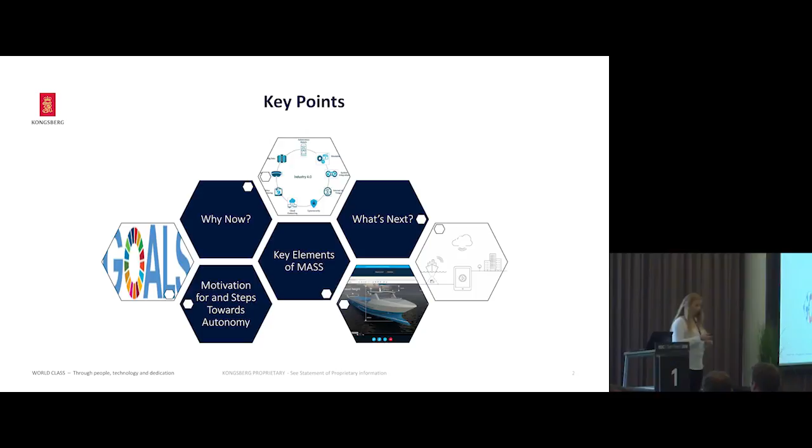But before I start with the details, I'd like to share with you Yara's motivation for going into this project and starting this really cool concept with the world's first fully autonomous, unmanned, zero-emission and ballast-free container vessel. So just watch this.

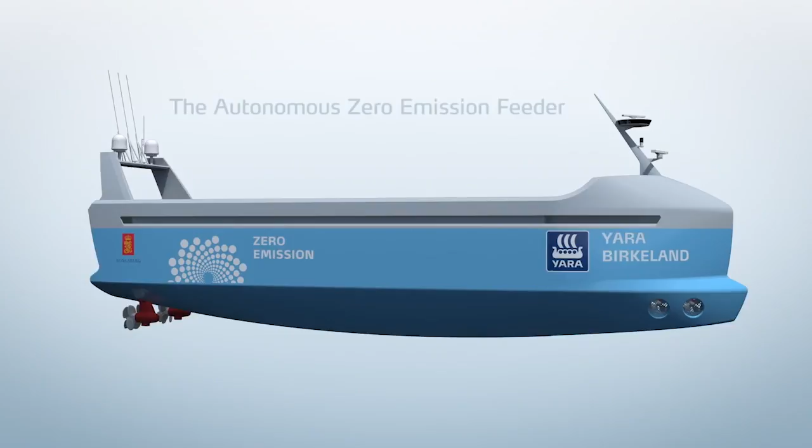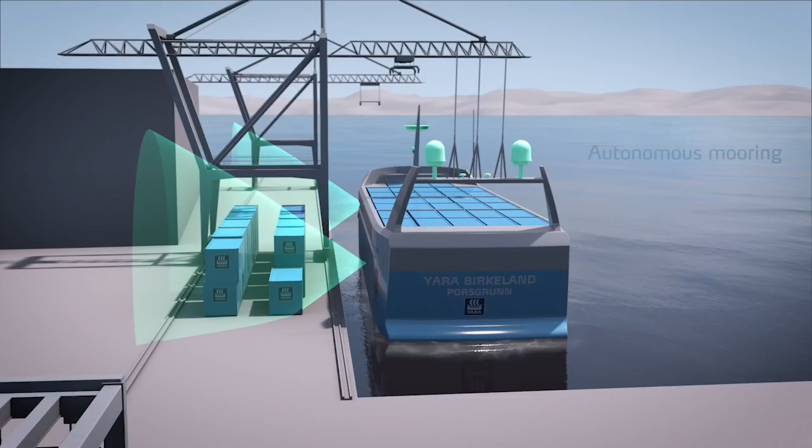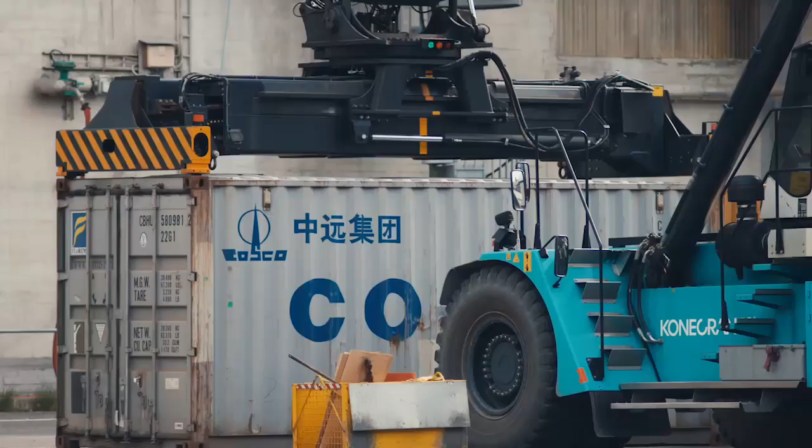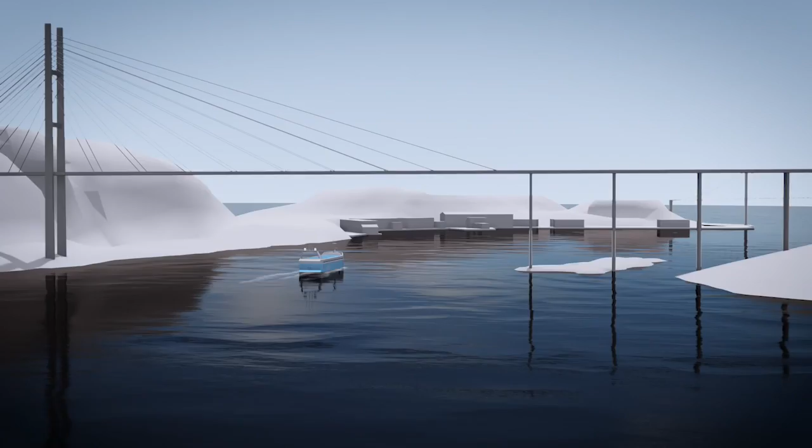Earth. It's filled with incredible wonder and immense challenges. And it is our collective hunger for innovation, our curiosity, and our collaboration that grows our knowledge and allows us to thrive. This is the first autonomous commercial vessel in the world, and it's also the first commercial zero ballast vessel in the world. The idea was actually to transfer the goods from the road into a conventional container feeder. That was the start. And then we started to look into more environmental friendly ways of doing the shipping activities. Yara is a fertilizer company, not a shipbuilder. So to make something like this a reality, we had to collaborate. For us, the natural and very good partner was Kongsberg, who has the technology to pull something like this through. This project is the world's first fully electric, autonomous, ballast-free container feeder. So it will be a game changer for the environment and for the shipping industry. The number of containers coming out of Porsgrunn have risen steadily, and it's become more of a problem the last, say, 5 years. So over time, we have been more and more interested in solving it. This vessel will transport fertilizer from Yara production plant to the two export container ports in Brevik and Larvik. We estimate that on behalf of Yara, it will transport approximately 25,000 containers per year. They have a real need, and they need to improve the local environment where they operate. So that's what's so exciting about this project. And I think what set this opportunity aside from many others is that we could reduce emissions by moving truck transport to sea. The thing about Yara is, if you look at our mission, is to feed the world and protect the planet. And very few opportunities arise that both enable us to save costs, to impact the environment in a good way, but also to really impact the wider business community positively.

Okay, so now you know a little bit more about Yara's motivation for going into this project, the world's first project. But as you have perhaps noticed, Yara is not a shipbuilding company, they are actually a fertilizer producer. Why are they coming to a technology company with a logistical problem? That's in essence what's going on right now. So we are really changing the game of the shipping industry just by this one actor being willing to take the risk to be the first. Okay, so that's Yara's motivation.

What about Kongsberg's motivation for doing this? It's because the technology is mature enough to handle this right now. My software architect, my guru, would you agree?

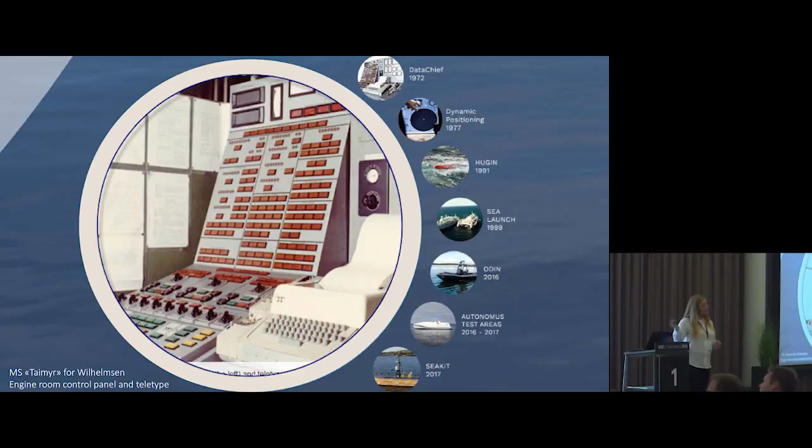At the bottom, we have the SEAKIT, which is actually just a suitcase for an AUV, and it's able to be traveling for 100 days without any contact with the mother vessel. So it's fully autonomous. Yara Birkeland will not be fully autonomous because it has cargo, and the cargo owner would like that cargo to arrive at the predefined destination, not for the vessel to calculate the price for the cargo and expect to get more paid another place. So that's why it's not fully autonomous.

So why now? We all know that we are in a shift right now. The manufacturing industry has seen 4 major industrial revolutions and advancements throughout centuries. We are building on: first we automate dull, dirty, and dangerous tasks, then we put them together in systems. Now we're going a little bit further than that, collecting data, putting things together, giving you a new reality, being able to test out before you actually have a physical thing. That's what's enabling this system we are talking about now. It's a timing which is good for this right now.

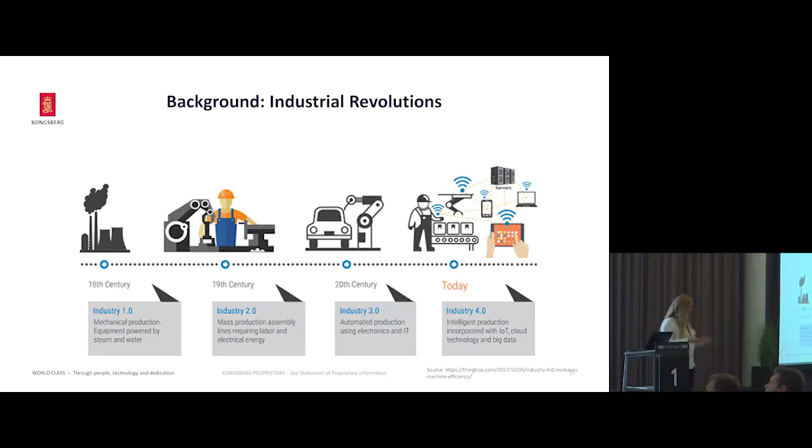In addition to that, there are central factors which we can benefit from with the maritime autonomous surface ships. So time is helping us. If you look at simulation, for example - how many of you think that the first test ever will be performed without people on board and classification societies being happy with that? Of course, we need to have simulations. We need to compute this. We need to test it in all sorts of different scenarios to be able to demonstrate the safety of the solution.

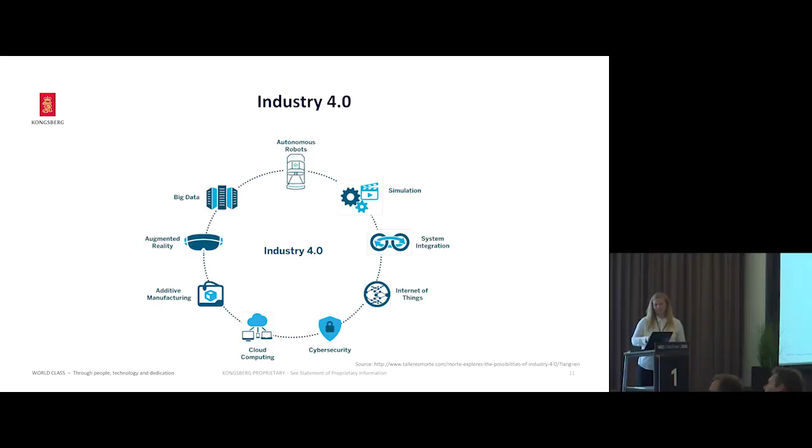So what does this mean for autonomous ships? We also have other influencing factors - you can guess what this is. For Kongsberg, for example, the maritime sector has been heavily invested in the oil side. So when that went down, there was suddenly room for people to be able to do other things, to look to new markets. We had a motivation to look to new markets.

The Paris Agreement, with emission reduction all over the world, is helping us, driving this potential forwards right now. It's very good, it's a good timing. IMO is helping us, focusing on the environment in the shipping industry. Even large companies are changing their names to accommodate for that shift, which is actually happening right now. I have a quote from the CEO of Yara - he said that those companies that understand that there's money and business in the UN sustainability goals, they will be here in the future, because there is actually a lot of money in this.

The EU is having a lot of funding for external funded projects to look into environmental sustainability solutions, eco-friendly, green solutions for the maritime industry, and of course we are benefiting from that also.

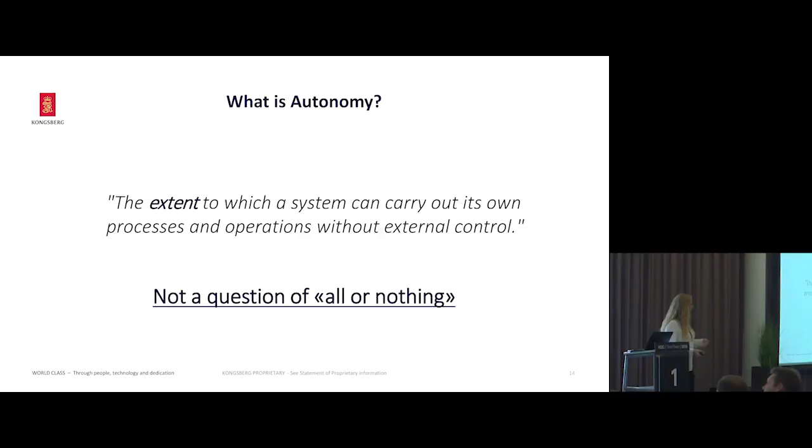So, what is autonomy? It's the extent to which a system can carry out its own processes - it's not a question of everything or just something. We can have parts of it. Hence my reference to autonomy and unmanned - those are two different things. You can have several levels of autonomy without it being unmanned.

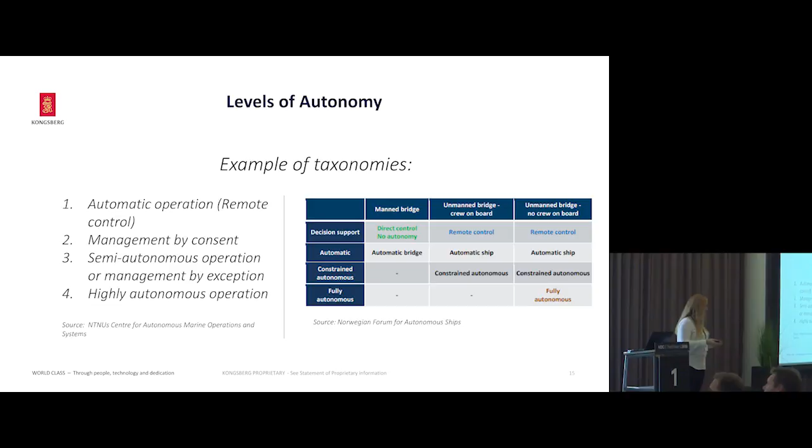Different instances are trying to put words on this. If we look at the AMOS Center at NTNU, for example, they have 4 different levels of degrees of automation. The Norwegian Forum for Autonomous Ships have tried to classify how different manning levels and different automation levels go together. If you look at that matrix, the Yara Birkeland is on the right-hand side, on the constrained autonomous side, meaning there are people in the loop still. It's not totally decoupled from people, but they will now be sitting on the shore side, and I'll get into that.

We introduce situational awareness - we are looking at perception, cognition, action. Advanced maneuvering, autonomous navigation is a central part of it. We have here, for example, the guidance system, collision avoidance, following COLREGs. It's really important that Yara Birkeland behaves like it should and like it's expected by other seafarers. Otherwise we will have problems.

We had a film crew from Danmarks Radio shooting a documentary on automated ships and other instances of automation. After they'd been together with us for a whole day, the reporter said, I think it's kind of scary - there's no people on board. How will I know that? But at least it has a friendly color - it's blue. So the human aspect of it is really important as well.

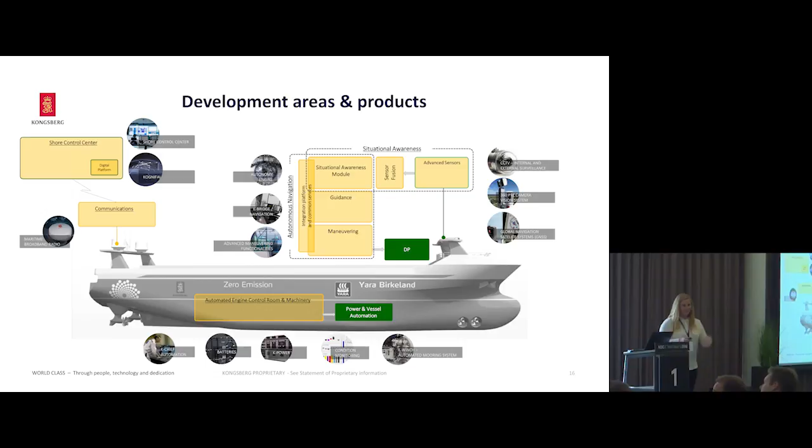Communication to shore and the shore control centers, of course, are also very important aspects, but I will get into that more in detail. From a very keen eye looking at this picture, I know it's a lot to take in, but in Kongsberg we are actually able to shop around for the best products and technology solutions to get the best possible solution as a whole system. You can imagine that one key word in this picture is configuration management. Who's going to have that job? Not me, but someone will need to take care of that.

Situational awareness - using sensors, putting them together, correlating the sensors to get a good understanding of what's happening around you. What if the captain is able to actually get the view which is best suited to his needs? Have you ever played PlayStation, for example?

Sitting in a car, you're driving a car, competing towards your friends - you will probably not select the view where you're sitting inside the car, right? You would like to see further ahead, and you'd like to see around you what's going on. This instance is just 12 cameras, regular cameras, store-bought, put together on Hurtigruten, using algorithms to sew it together just to get a nice view of what's happening. It's actually also detecting targets and training its models to learn, detect, and recognize targets, which will be used to have safe distances from different targets and also categorizing them.

This is not really advanced, it's quite easy to do. But of course, having a solution which is verified with the regulatory bodies, that's another issue.

Just going to go a little short about other aspects. We're working together with other companies on a stepwise approach toward the full picture, which is Yara Birkeland. Bastø Fosen, anyone traveled on that one before? Horten-Moss? Yes! If you go on number 6 next year, it'll dock by itself.

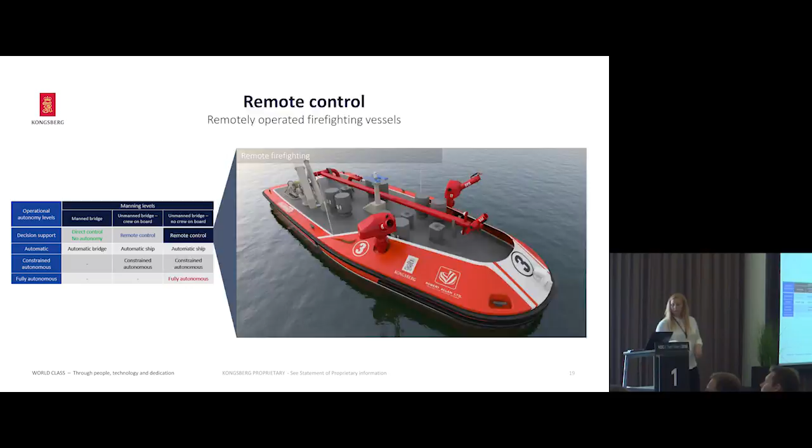Asko, traveling on the roads, moving a lot of goods, traveling through Oslofjordtunnelen every day. People who use that route, it's a subsea tunnel. It's closed almost 300 times a year. You can imagine that interferes with their logistical operation.

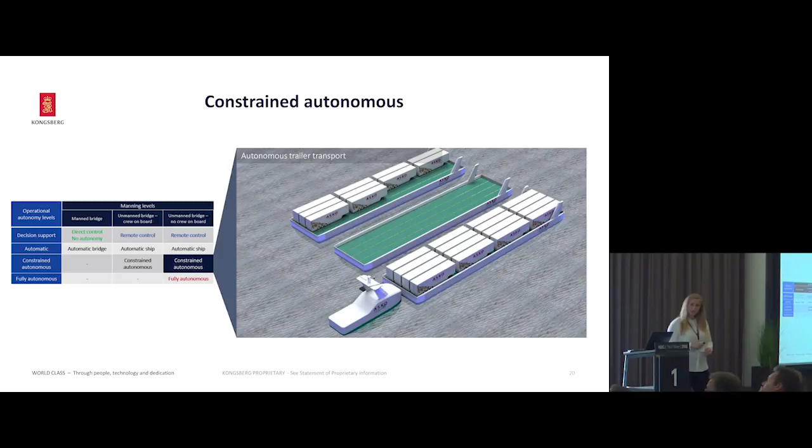So now they are looking together with us to make autonomous barges crossing the Oslo Fjord, fully electrical also. So we're taking steps towards autonomy. And the X-Prize, which I talked about, which is fully autonomous.

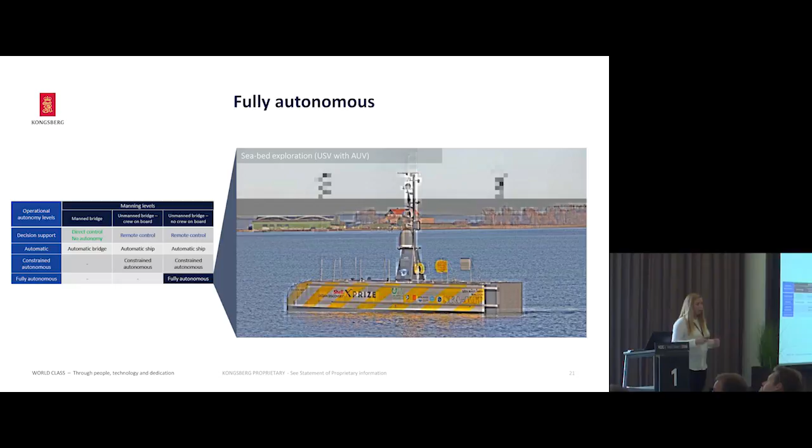It's hard to talk about maritime autonomous surface ships without going into safety. Cybersecurity is a hot issue here, and that would be a lecture by itself. But what I can say is that we're building on safety levels down to component level, and lucky for us, we have that ability and knowledge from our defense area in Kongsberg. And we're taking that kind of knowledge into how we build this system.

Collision avoidance, together with sensor fusion and situational awareness, are the primary functions necessary to be able to fulfill autonomous surface ships within the regulatory framework. And sensor fusion, of course - we talked about that. It's nothing more than what people are doing. We use our senses, put them together in our brain, and we get a good perception of our surroundings, how we should behave.

But I'm guessing some of you are sitting here thinking, one thing is to get the system to react to something it has identified, a situation it has identified. But what about the captain, the knowledge he has? He probably would take action if he senses that something is about to happen before it can actually see something in the water or something happening. How will we be able to train that into our systems? We don't know yet, but we're going to figure it out.

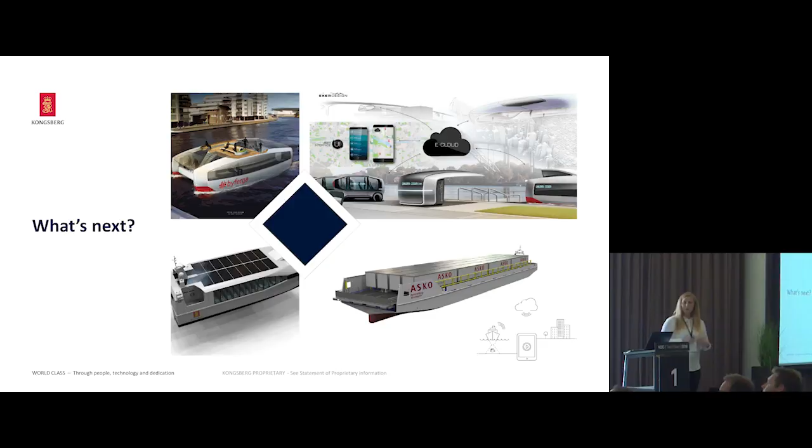In Trondheim right now, they're working on a little bicycle ferry for 12 people, and it's on demand. If you need the ferry to come over, you just push an app, and it will come and pick you up, instead of having regular scheduled hours. Of course, it only takes like 5 minutes across over Ravnkloa, but still, it's a really nice approach to it, getting things connected together and on demand.

The operational part of it, the shore control center, is a really fundamental part of autonomous surface ships. And it's not just taking the crew from the ship onto the shore, it's a lot more than that. What we at least know we need to cover is the onshore systems. We need the ship systems to have full control of that, and the real-time aspect to be able to take remote control over the vessel.

There's a lot of planning. It's a logistical solution. As I said, Yara Birkeland has a logistical challenge. It's not just a vessel, it's a part of a logistical chain. We need to be able to interact with the factory, with the cranes on the quayside, with the sailing permittance from the Vessel Traffic Surveillance Center, all the way to delivering the goods on the other shore.

We have the ship systems. We need to take care of maintenance. Everything going on board, we need to know the status on that. And we need to be able to take remote control when we have a situation requiring that.

But what else? What are the actions the people on board are doing manually today? I just talked to a captain, he said, I'm filling out a checklist 8 times a day manually. Why is it manual? Is it able to be automated? To have a historical view on it, for example, just small things. They don't need to be sexy or fancy or very high tech, but it's really helping the people.

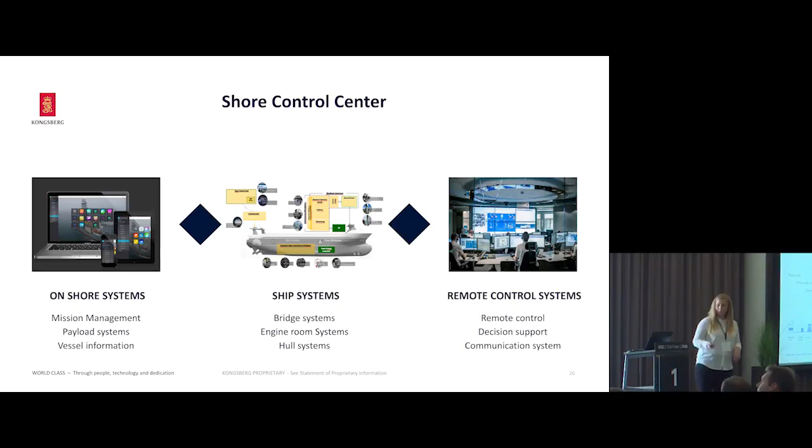Another thing we've done - I mentioned we were 200 years old, right? Feels like we're a little startup in a large company. We have also taken new steps. We teamed up with Wilhelmsen on establishing Massterly, which will be the operator of the world's first autonomous ship. So Kongsberg will provide the technology, set up the hardware and systems, Wilhelmsen will provide the knowledge of ship operation, and Massterly will take care of everything from design phase to manning up the people sitting in the shore control center, maintenance and the full operation.

So that's interesting, I think. Right now it's only one person working in that company, but there are more people to come, and we have a vision, because we know that if we hadn't done this, someone else would have beaten us to it. So I think we are actually taking some steps here.

Just 2 years ago, our summer students set a world record by water skiing behind an autonomous vessel. And we have now gone into contract with Yara Birkeland, the world's first autonomous and fully electrical vessel. We're also building up the world's first company for operating unmanned vessels. So I think it's kind of cool - we have guts, even though we're 200 years old.

Jan Eivind Wang at Wilhelmsen, a seasoned person with a lot of experience, said: if I were to apply for a job in Wilhelmsen today, I wouldn't get it. Right now they're actually hiring 30 people with IT backgrounds. They have traditionally been a shipping company, but they see that there's a shift in the competency needed for the next generation.